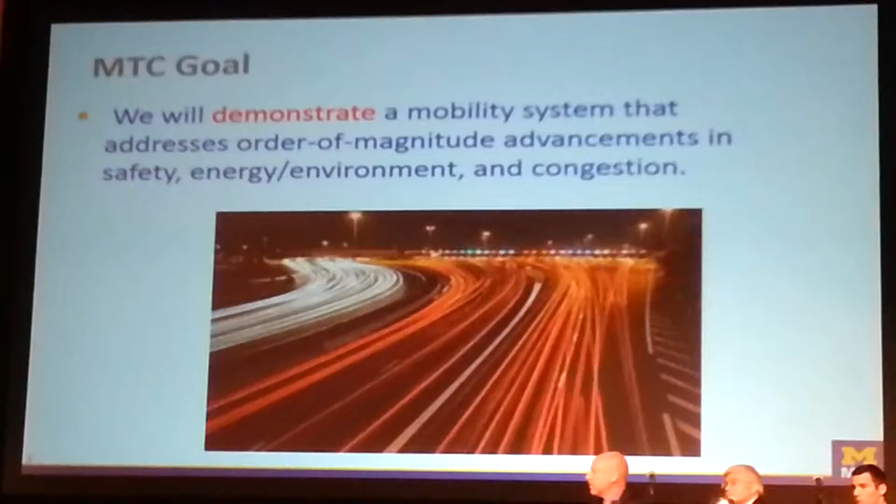And so let me jump right into the three projects. If you are going away without remembering anything else, I hope you will just remember this slide. MTC, Mobility Transformation Center, has the goal of launching three projects. The first project is to expand the safety pilot model deployment project that you have heard a couple of times today. But this afternoon you will hear a little bit more detail from Debbie, one of my colleagues at the University of Michigan, talking about the details of the safety pilot project.

Right now we have about 3,000 vehicles in the city of Ann Arbor, and also a quarter of the city was instrumented, and we want to expand that to about 9,000 vehicles and to about the whole city of Ann Arbor, including the surrounding freeways. So I'll tell you a little bit more details later, but this is one of the projects.

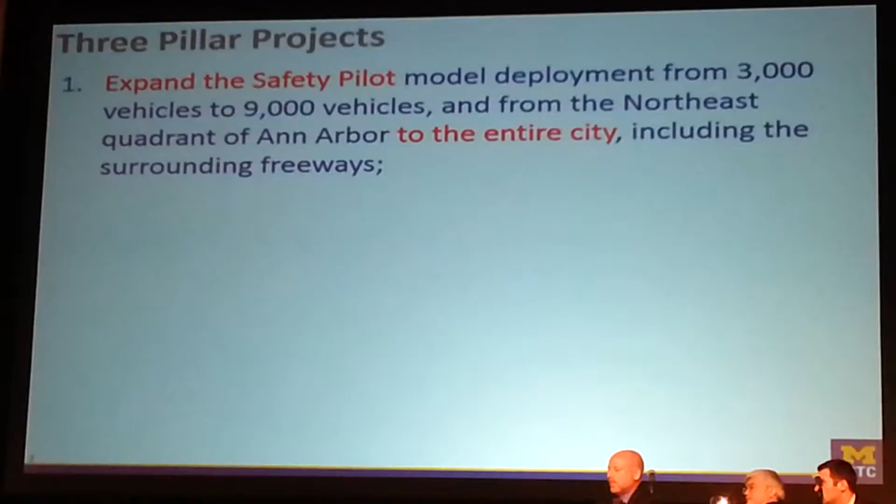The second project is working closely with not only DOT but also the Michigan Department of Transportation to connect the freeway systems in southeast Michigan. And we think we can easily recruit about 20,000 vehicles, mostly from corporate fleets. Just to give you one example of why I said we can easily do that: Ford Motor Company, one company, has a corporate fleet of 30,000. So by working with a few of these automotive companies in the region, we think we can recruit 20,000 vehicles.

And by instrumenting the highway system, particularly two interstate highways, I-94 and I-275, and with this large fleet, we think we will be, again, building a living laboratory to test the selected V2V and V2I functions.

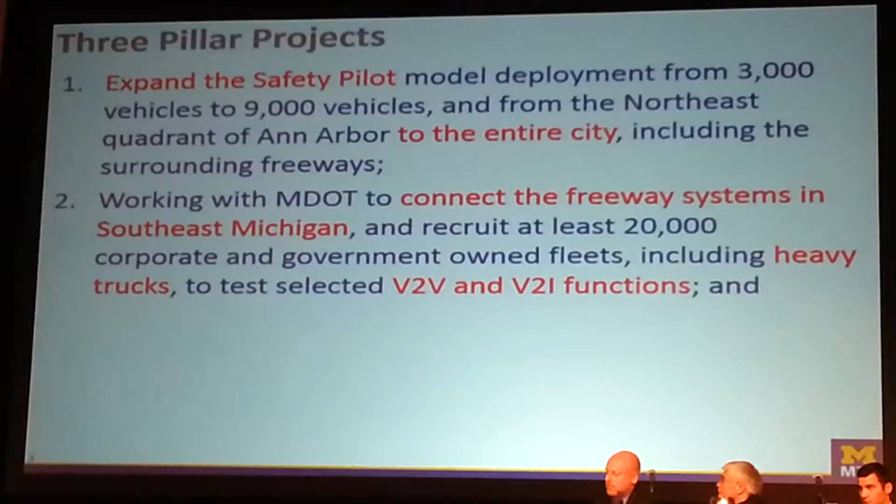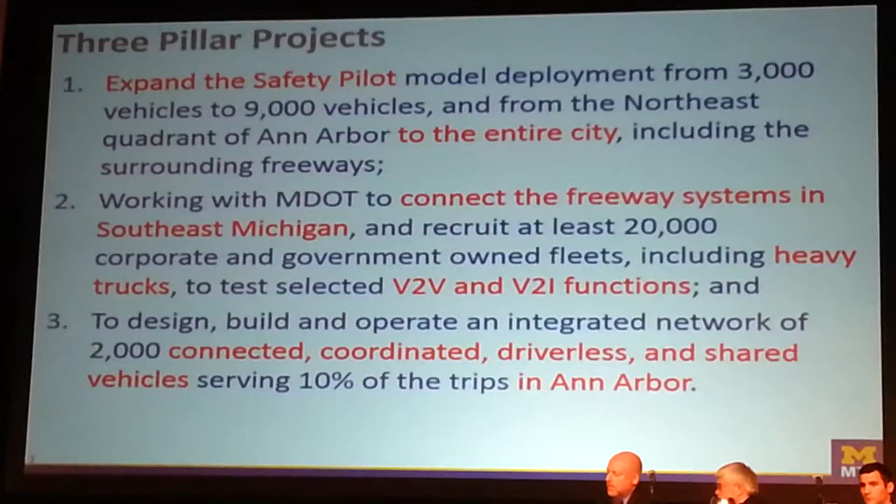And the third project is to design, build, and operate an integrated network of 2,000 connected, coordinated, driverless, and shared vehicles, serving roughly 10% of the mobility need in the city of Ann Arbor. Okay, so that's the vision of the three projects. So let me give you a little bit more details of these three projects.

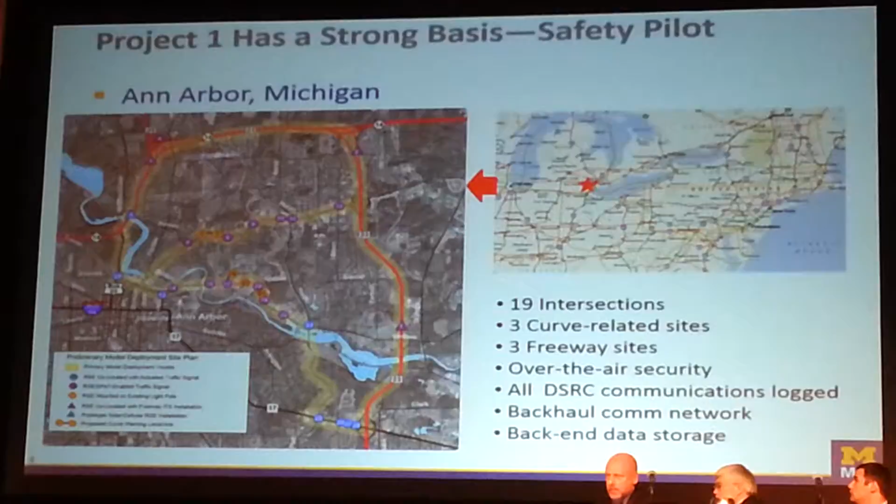The first project has a very strong base. So again, you heard about the safety pilot, and this is basically showing the northeast quadrant of the city, and we have instrumented 19 intersections and some curve speed warning locations and so forth. And right now we have about 3,000 vehicles. Again, this is showing the fleet. Most of the fleet are recruited, privately owned cars, but we also have some truck fleet, and also the University of Michigan bus fleet is pretty much instrumented, almost all.

And this is a detailed breakdown of the 3,000 cars. About 2,400 of them only talk, so they have GPS, they have DSRC, they talk to each other, they talk to the infrastructure, but they do not listen. On the other hand, there are 300 cars that not only talk, but also listen, and give some example safety warning functions.

The purpose of these vehicles is not to refine and improve these safety functions. We're just testing the real-life performance of this DSRC and the communication data recording system, and to see what the opportunities are. So that's why we call it safety pilot. It is only a pilot study, not a commercialized study. The third group are 67 cars, 64 passenger cars and 3 trucks, basically designed by the CAMP partners.

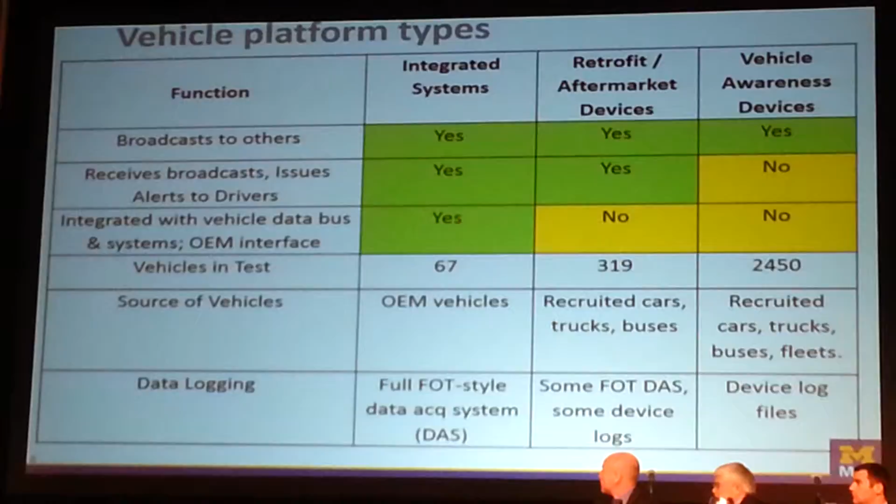So these vehicles are a lot more complicated. The DSRC and GPS are fully integrated with the vehicle CAN bus, so the vehicles record a lot more channels. This is a lot more advanced than the 300 cars we have in the middle.

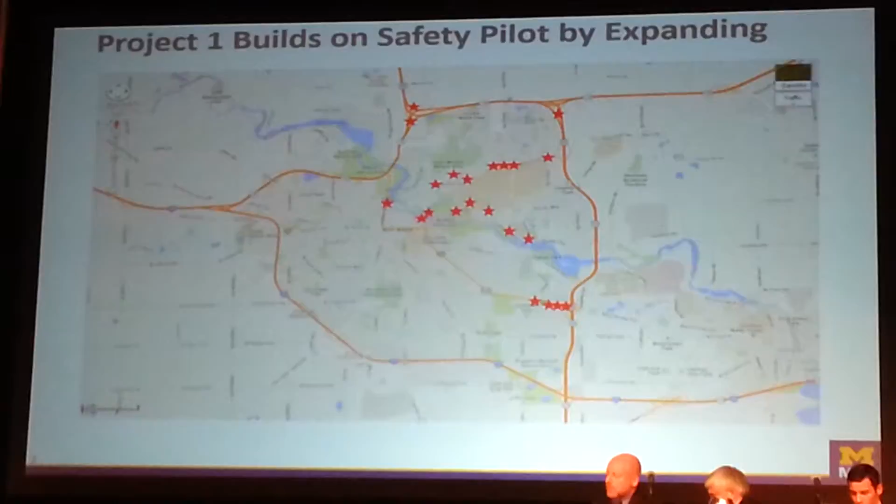So what is the plan of Project 1? Project 1, sometimes we also call that Ann Arbor Connectivity Project. So this is the current locations of the instrumented intersections. And again, this is the statistics, 19 intersections and so forth. And this is limited to the northeast quadrant of the city. And we have about 2,800 vehicles. And this is the plan.

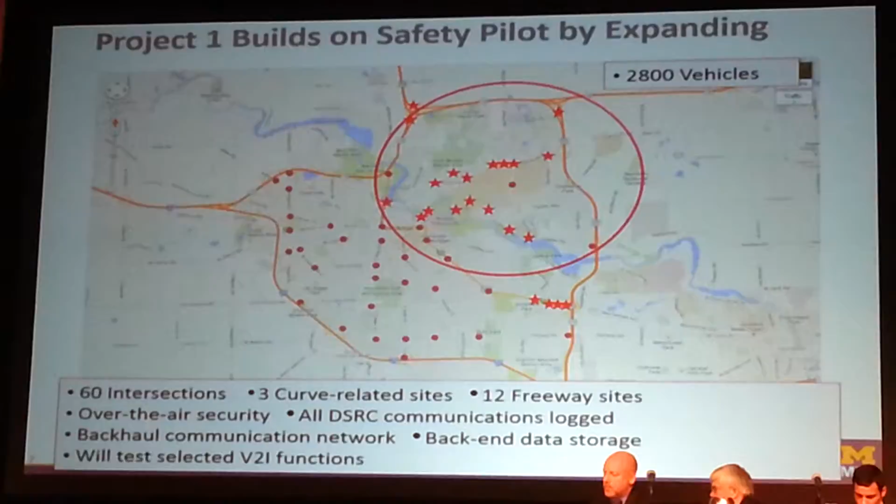The plan is we want to instrument many more intersections, cover the whole city of Ann Arbor, and again, wherever fiber optics end, we will be instrumenting the surrounding highway system also. So the city of Ann Arbor is very manageable. The vertical height is about 5 miles, and east-west is also about 5 miles. So it's a good-sized city with a very busy downtown, but it's manageable. And we think at the end we will instrument 60 intersections and the whole city and 9,000 vehicles.

So why are we proposing to make things bigger? That's not the whole point. The point is not only we are making the whole city a living laboratory to test many of the functions, but also in the next phase we think we will greatly enhance the scope.

For example, this is statistics of the traffic fatalities in the U.S. You see the red bars, the total number of fatalities are coming down. However, if you look at the blue, which is the motorcycle, and the green, which is the pedestrian percentage, looking at the right-hand side of the vertical axis, together they are responsible for about 30% of the total fatalities. And the percentage is increasing over the last decade.

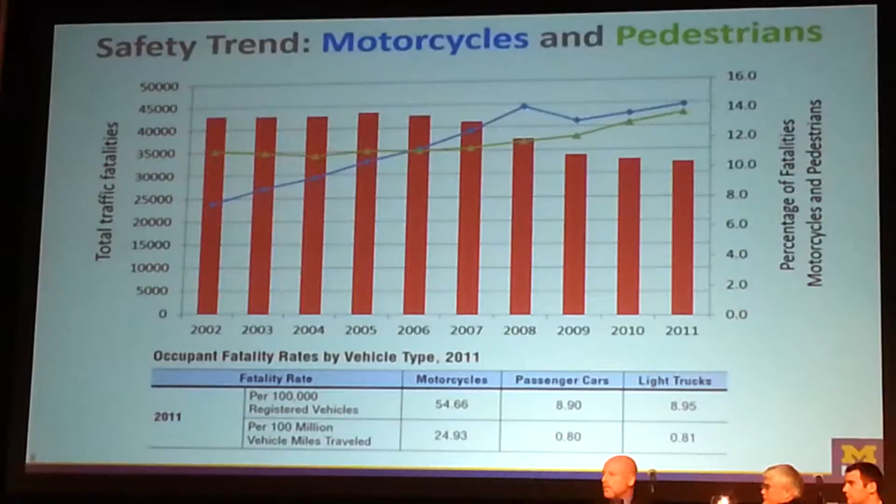So we think in the next phase, one thing we will add, this is just one example, is to dramatically increase the testing of functions related to motorcycles and pedestrians. And the table in the bottom shows that motorcycles are a lot more fatal and a lot more dangerous. We cannot say about vehicle miles traveled for pedestrians, but there are a lot of pedestrians killed.

In the current safety pilot, we do have 2 motorcycles, and we have tested some very initial functions, but this will be expanded in the next phase. And we also want to expand to bicycles. We have 1 bicycle currently, and this also will be expanded.

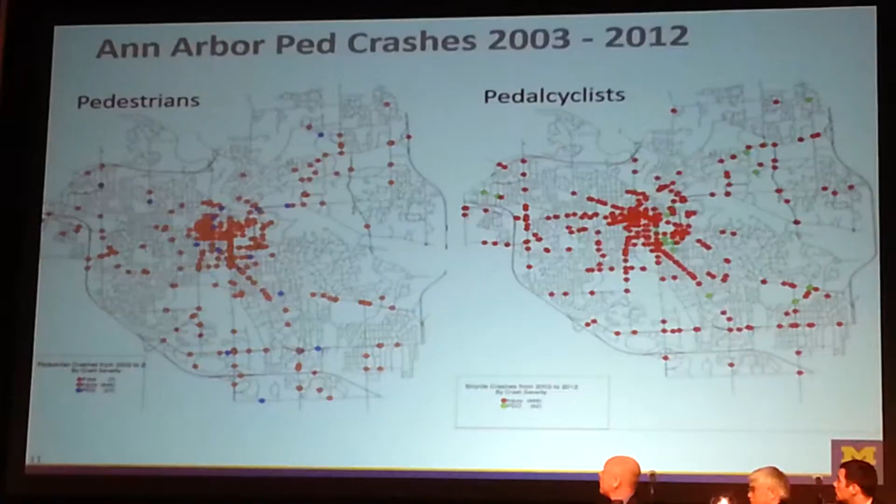And finally, if you ask how many pedestrian accidents were happening in the city of Ann Arbor, we have our share. These are the statistics of the pedestrian accidents and pedal cyclist accidents that were happening in the city of Ann Arbor. Quite a few. Most of them are injury only, but we do have a few fatal accidents shown, for example, the red diamond shape symbol and so forth.

And the city of Ann Arbor also has a very busy downtown because it's a college town. If I just point you to the upper left figure, you can see that we do have wide streets, this is Plymouth Road, and the speed limit is 45 miles per hour, but it's mixed with pedestrian traffic. In the right upper photo, you do see that in the downtown, students are ignoring the traffic signals, and even when it's red, they just walk through the cars.

Probably they believe all the cars are instrumented, they are all V2X connected, and they think they can maneuver through the traffic safely. So it's a very fertile ground for study of very interesting pedestrian-vehicle interactions.

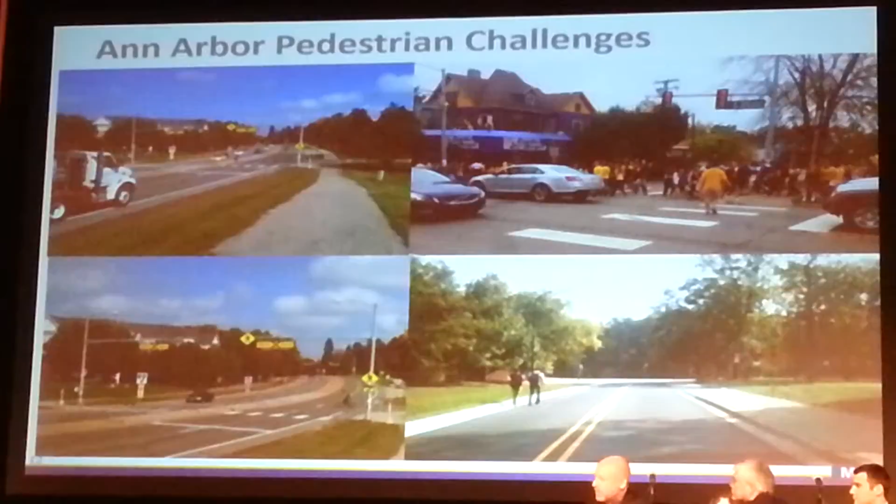So currently we are thinking about the P2V, pedestrian-to-vehicle communication concept, and we think they will be integrated with mobile phones. I'm running short of time, so I need to pick up my pace.

Project 2: basically the U.S. has invested more than $1 billion over the last 10 years on V2V, V2I functions, especially on the connected vehicle side. But other countries are deploying, including Japan and Europe and China. Assuming positive NHTSA V2V decisions by the end of this year, we think that there must be a project that demonstrates and defines the day one benefits clearly.

And the argument of why Southeast Michigan. First of all, there are many test beds, including the one in the city of Ann Arbor I just described. And oh, by the way, many of you, I hope, are coming to Detroit for the ITS Congress next September.

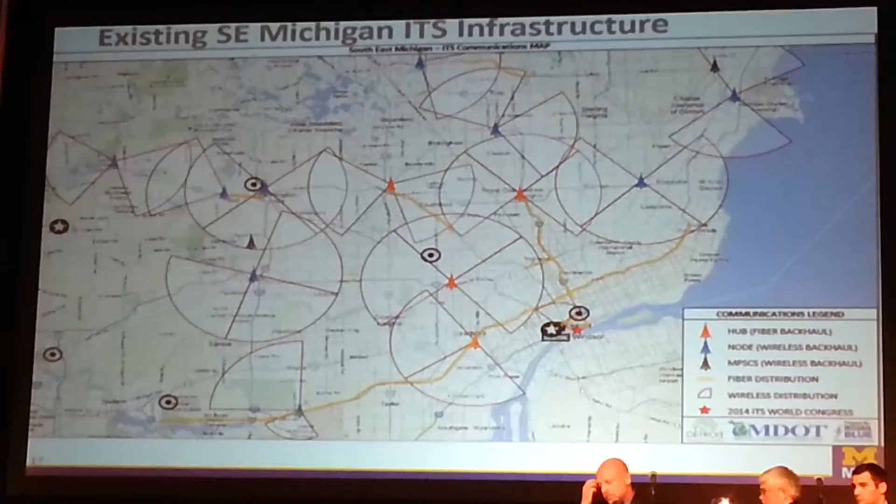And this is the chart showing the optical fiber infrastructure, and they are important to implement the IPv6 protocol for the connected vehicles. And the stars are showing the major automotive research and development centers, and these are showing locations that we know are doing automated vehicle research and development.

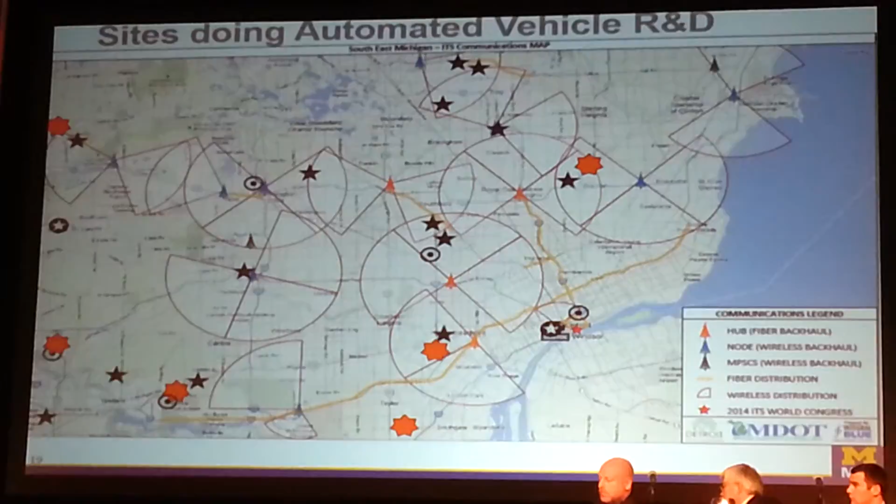Again, just by saying Ford Motor Company alone has a 30,000 corporate fleet, this is probably the best environment to build a living environment and to test large-scale V2V, V2I demonstrations. So we do think that Southeast Michigan is the ideal location. Again, this is the scope. 20,000 vehicles, we'll be installing about 500 infrastructure nodes and distribute some aftermarket devices, 5,000 of them also.

And also it's very important to mention that the lessons learned in Southeast Michigan can be duplicated to other locations. So we think it's a good first try, but we're not precluding, or we will be cooperating with many other places to make sure that we learn together.

Project 3 is very ill-defined at this moment, but then again, many of the companies are talking about automated or even autonomous vehicles by 2020. And this cannot be happening without the support from many other things. For example,

within the scope of this project, we'll be working with the city of Ann Arbor and the state of Michigan to make sure that we change and adapt the regulations so that autonomous vehicles can be tested first in our test facility and then move on to the campus of the University of Michigan and then move on to the city of Ann Arbor. And by doing that very carefully, in learning phases, we think we will be helping to move the state-of-the-art forward.

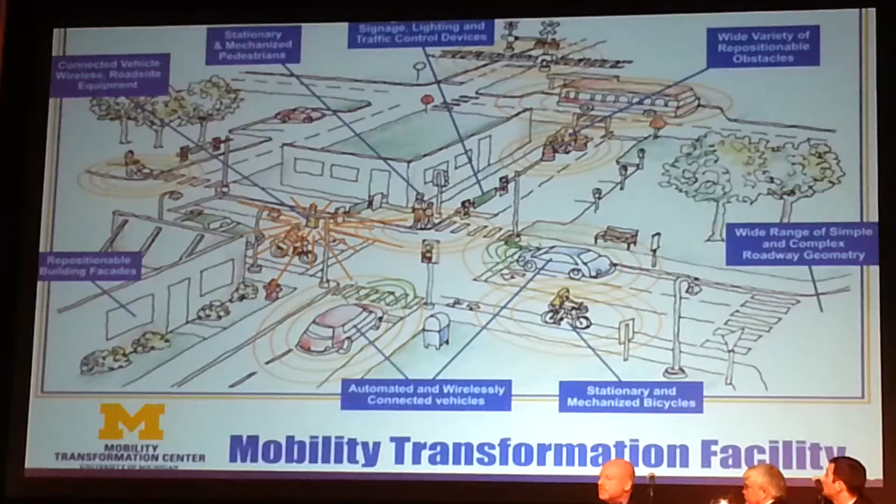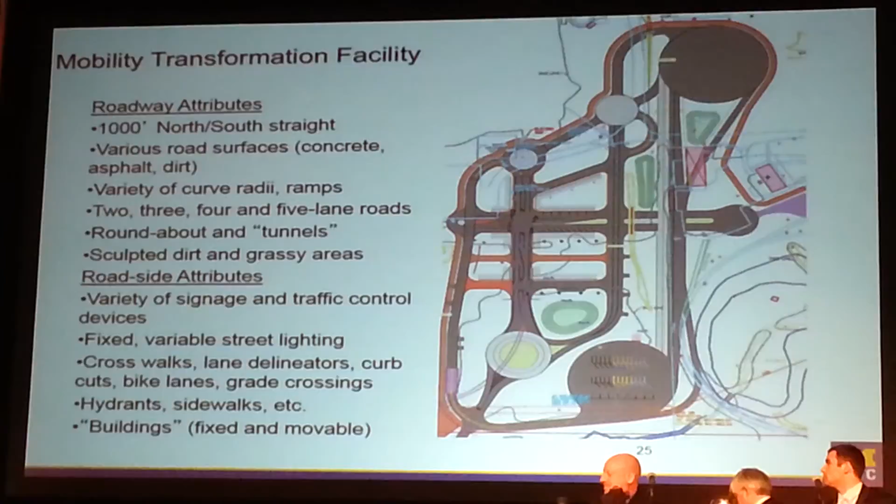And I'm showing you a very low resolution idea of the layout. We are not supposed to give any handout of this yet, but you can see that we do have a track layout design already, and I'm showing you some of the details, but in the interest of time, I will just go through that very quickly.

So in summary, if you don't remember anything else, we want to demonstrate a mobility system that addresses orders of magnitude in investment in safety, energy, congestion, and societal impacts. Currently, we have 3 projects. If you can remember them, I would very much appreciate that. Ann Arbor connectivity, Southeast Michigan connectivity, and Ann Arbor automation.